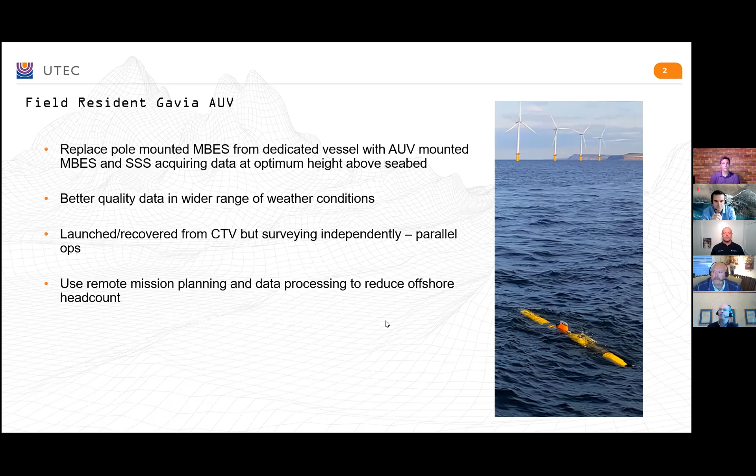The big bonus of this is we don't need a dedicated vessel. We can launch from anything, the CTV, and the Gavia can go off, do its survey, and then rendezvous with the CTV when it's finished. That lets the CTV get on with its own work, so we remove a survey vessel from the field. We can also reduce the head count operating the AUV through remote mission planning and remote data processing, but we still need an operator in the field.

To explain more about the Gavia: it's a 3.5 meter long, 200 millimeter diameter torpedo essentially, with a propeller at the back, and sensors mounted in a series of modules that click together very easily. It's battery powered, with a control module housing a lot of the INS and navigation software. You reference the INS using GPS built into it, so you can feed it RTK or corrected positions, which seeds the INS so that when it goes subsea, it's navigating on INS and DVL.

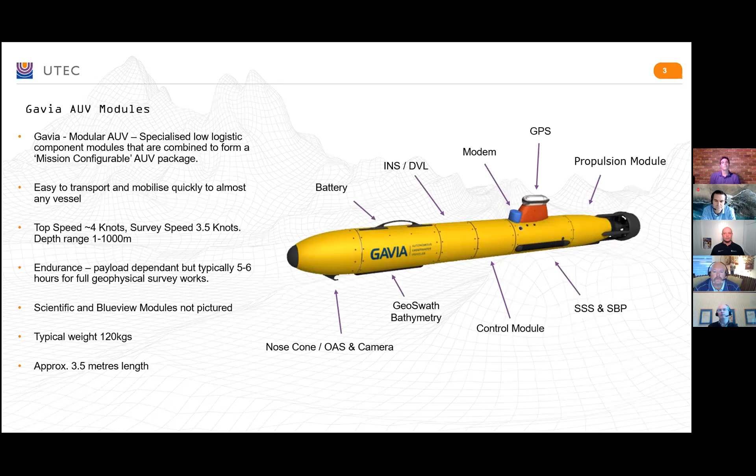We can easily move it to a job and transfer it from boat to boat because it breaks down into modules about 300 millimeters long. Typical survey speed is 3.5 knots, with a depth range of 1 to 1,000 meters - though that doesn't really apply in wind farms, where we're working more like 20 to 60 meters. We typically get 6 hours on a battery charge, and you can change out the battery modules to keep the same vehicle running. It weighs 120 kilos, so two men can lift it and move it around the deck or carry it onto a boat.

Looking at some of the sensors, we don't have a Reson or R2 Sonic multi-beam. We have the Geoswath Plus, which is a 500 kilohertz interferometric swathe bathymetry system.

That's probably our most difficult part in getting Gavia adopted by the wind farm operators. Their specifications are written for pole-mounted multi-beam, and we spend a lot of time explaining that interferometric is as good, if not better, in certain aspects than multi-beam, but it doesn't meet the specification they've got written. So we have to try and persuade them to accept this alternate system.

It's very efficient at what it does - that's the whole point of interferometric. You can get a greater range of swathe in a single pass. We typically work at a 5 meter altitude, and that will give us a 40 to 50 meter swathe of good quality data. There have been various papers that say it's IHO special order 1a compliant, but as I say, that's our challenge - persuading the wind farm operators of this.

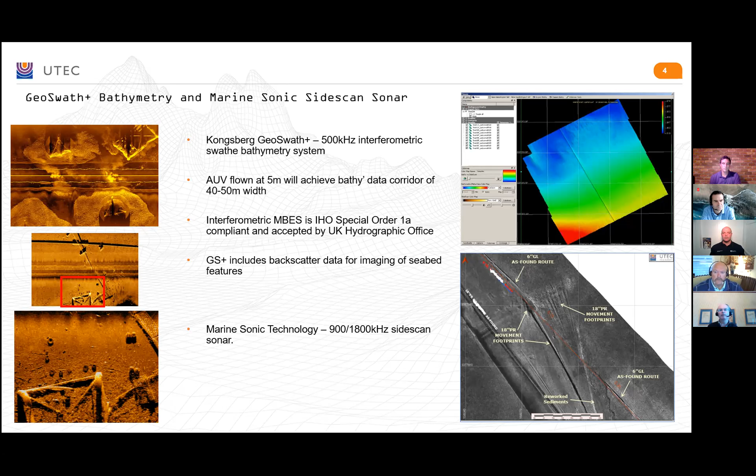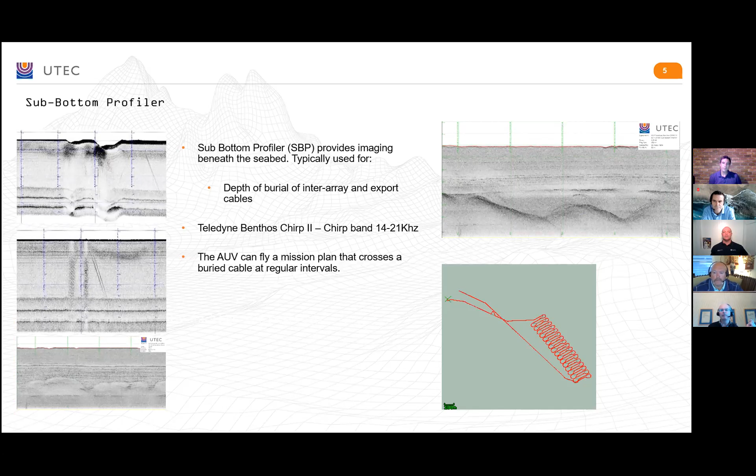The sub-bottom profiler isn't the strongest sensor on the vehicle, just due to size and power limitations, but it's good for export cables, though it would struggle with most inter-array cables. It is there though, and we can program the Gavia to fly in a mission where it goes backwards and forwards across the cable to get a series of depth profiles.

The camera is a monochrome camera. It wasn't as widely used as it should be when we've been doing pipeline inspection in deeper waters and route surveys, but it has come into its own in the shallower water of the wind farms. That's because we're getting quite a lot of ambient light coming down to the seabed, which gives us better lighting than we get from the built-in lights on the Gavia. So we're able to get good quality images with wider coverage than when we were just reliant on the Gavia camera.

We can also just mosaic by the Gavia position, so you can stitch the photographs together using the metadata associated with each image. Then once we've got that georeferenced point cloud from the mosaicing, that can be imported into the multi-beam side scan data.

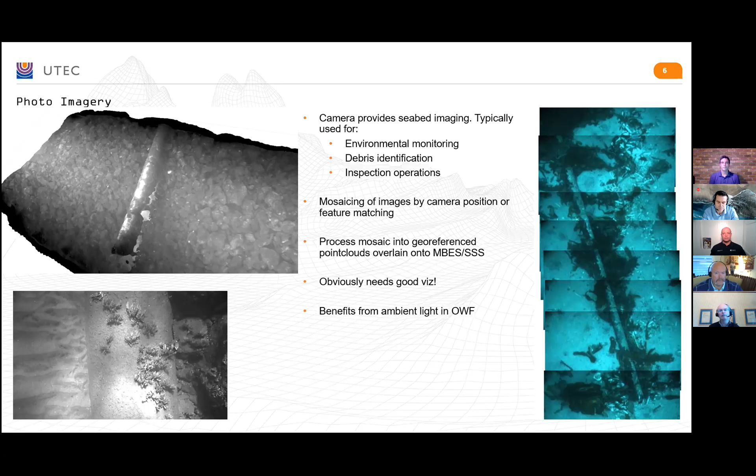Obviously you need good visibility. If you can't see anything due to mud in the water, you're not going to get much, but we're finding that a lot of the wind farms actually have good viz.

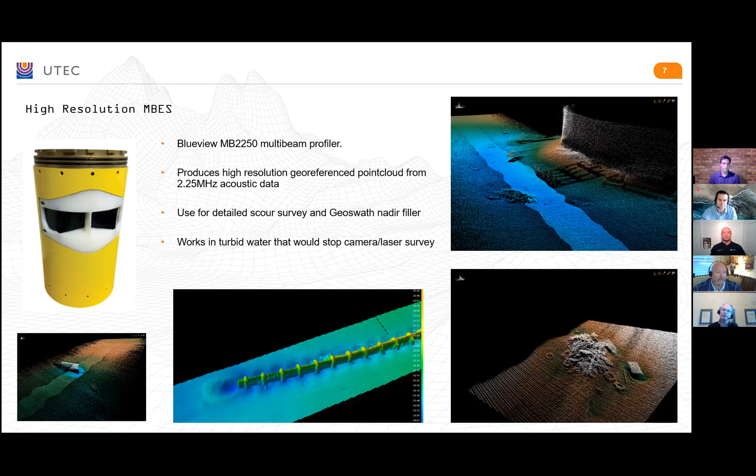A couple of years ago now, we invested in a BlueView module. That gives us a 2.25 megahertz imaging sonar, which can produce a point cloud. We can use that for detailed scour surveys, but it also fills in what's known as the nadir gap on the Geoswath. Unlike a multi-beam, where you can have beams across the full swathe, the way the interferometric system works there's actually a gap in the data below the Gavia. So by using the BlueView as a gap filler, it means we can increase the line spacing - we don't need the overlap that we used to do.

There is another module called a scientific module, which is basically an interface for any other sensor you want to attach to the vehicle, either internally or externally. Teledyne, the manufacturer, have developed a couple of magnetometer options, towed and built-in, that can go with a Gavia. You can also add video cameras or even a laser profiler, all within the weight limits of the vehicle - it's not a Hugin with a huge payload.

It's a 120 kilo torpedo.

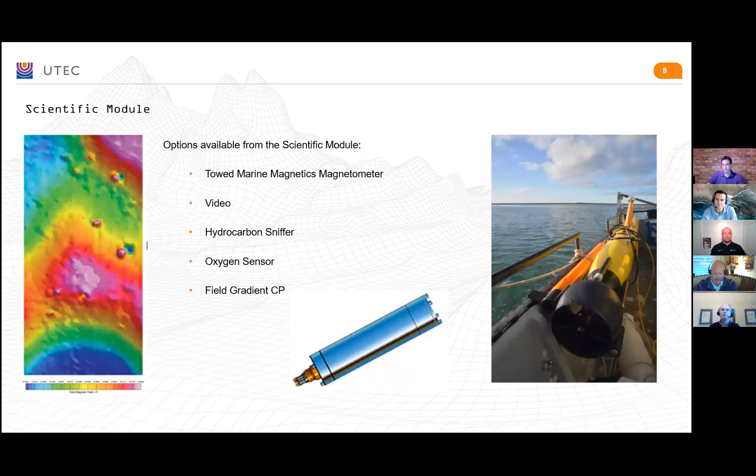This is the launch and recovery aspects of it. Because of the vehicle size and portability, we can go on to almost any vessel platform.

We prefer to use some form of crane to get it into the water. Gone are the days of manual handling, 120 kilos in and out of the water. So with a vessel crane, we can launch and recover with soft strops, boat hook for recovery, or we've got a variety of cages which let you deploy from bigger vessels with higher freeboard, and you just fly it in and out of the cage.

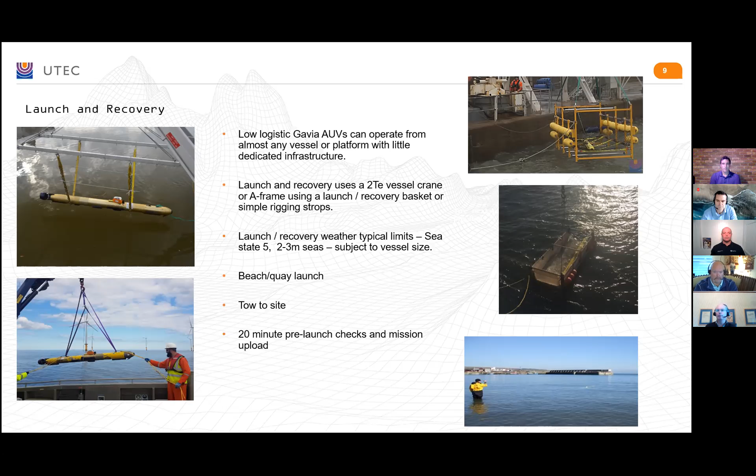You can put it in the water at a quayside or a beach, and it can then travel out to the work site, or you can actually tow it. If you had a small boat and were working in very shallow water, put it in the water in the harbour, then just tow it to site and release it to go do its mission. So very low logistics in the sense that we can operate without the dedicated large systems we see with bigger vehicles.

Operations, as I said before, 5 hours will give you plenty of time to be launched from a CTV, go away to a survey area, do a grid survey, and then return to rendezvous with the CTV.

We say that we need 2 AUV operators. This is where you're sending this very expensive bit of kit out on its own, and it's not like an ROV where you've got a tether to help recover the vehicle if everything goes wrong. So what we say initially is that we need 2 AUV operators to work the vehicle, because in the event of something going horribly wrong, it's a lot of pressure on one person. Now, what we foresee is that as we become a field resident vehicle, the CTV crew will become very familiar with the vehicle and launch and recovery, and they will start to help be the second man.

And that's in the business model we sell, for us eventually having a single operator supporting the vehicle.

Daylight operations, but not essential. It's fitted with enough communications and strobe lights that we can launch and recover at night, and it can obviously work at night subsea.

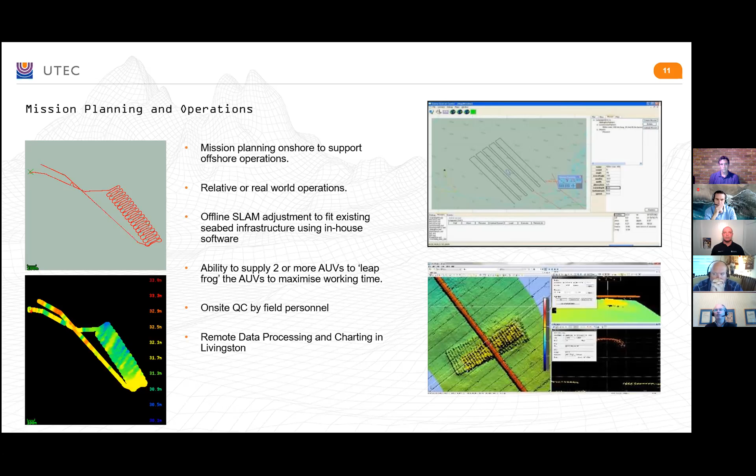So we've done various trials and demos for wind farm operators and been matched against conventional survey vessel CTV operations, and in all cases we've been able to show we've got greater weather capability and produced better data, without taking up boat time in doing it.

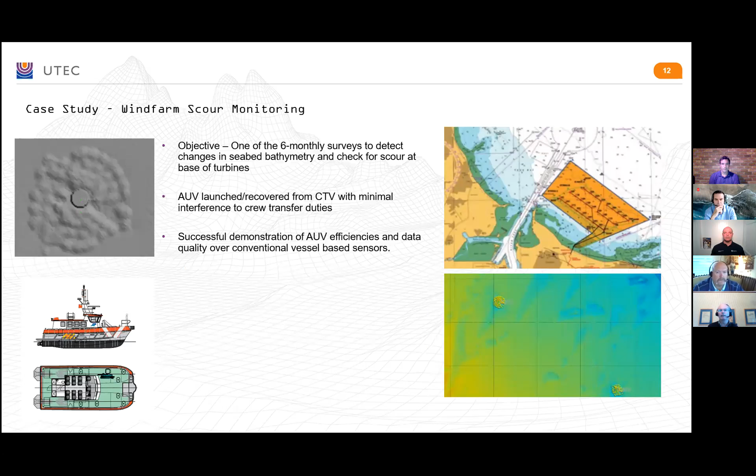So this is, for us, a key market that we're selling into, not just in Europe, but also now in Taiwan and East Coast USA.

Keith joins us from Blue Ocean Marine Services out in Western Australia, where he's the general manager. He's been with Blue Ocean for just over 5 years. Prior to that, he has a link with Trevor because he used to work for UTEC Survey. He's got a background in metocean science, spending about 12 years as a scientist. Educated at the University of Newcastle upon Tyne with a BSc with honours in marine biology, followed by a master's from University of Plymouth with distinction in applied marine sciences.

Blue Ocean Marine Services was established in September of this year.

This is born out of the group that I've been involved with for over 5 years, Blue Ocean Monitoring, and the Vertech group. So it is a joint venture. The reasoning behind that was that Blue Ocean Monitoring was set up on the belief that autonomous systems would revolutionize how we do things offshore, and it quickly evolved into more of an R&D hub.

Blue Ocean Monitoring have been successful in setting up a few businesses. One you may have heard of is Blue Ocean Seismic Services, now owned by Woodside and BP, looking to revolutionize the seismic industry by designing and developing flying ocean bottom nodes. We also have a number of two defense businesses, again very much focused around R&D.

So I guess the focus was lost on commercial survey delivery, and hence why this JV was created. We went with the Vertech group because they have a lot of synergies in terms of the technology they use and embrace, their geographical footprint, and their presence in the oil and gas sector. So together we've now formed Blue Ocean Marine Services, a global survey services business.

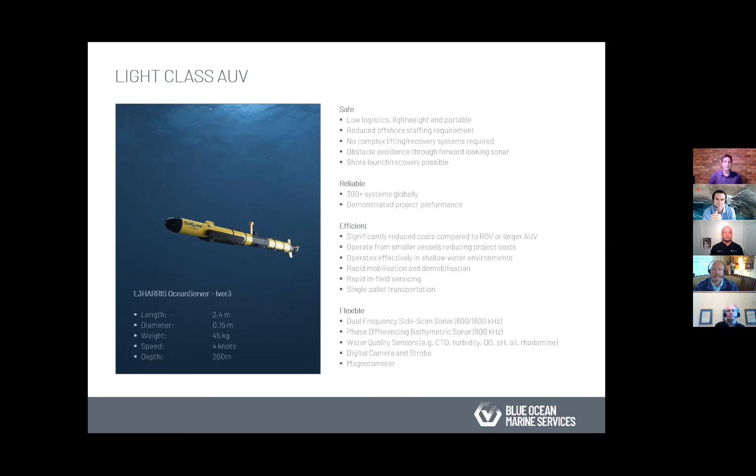Going through this, specifically around pipeline inspection, we invested in the IVER 3 in the middle of last year, and we put it to test immediately on a project here in Western Australia, really as a proof of concept. That has evolved. We have a fairly rigorous in-field testing program here at Blue Ocean Marine Services in waters off Perth.

Really for us, we were looking at a number of key success criteria for this application. The obvious one being lowering cost. We were looking at, can we reduce operational schedules or be opportunistic and flexible in terms of schedules? So if weather windows limited or opened up opportunity, we could go for SimOps, for example, where we can deploy and be ready in short timeframes.

From a logistical standpoint, a big thing with AUVs and ROVs traditionally is getting things to site. So looking at that, the labor effort, the intensity around logistics, and then obviously you're looking at risk, whether that be project or financial risk, environmental risk, and of course human risk.

That's all well and good if you can lower those things, but if you can't maintain status quo in terms of quality, there's no point trying. So if we can satisfy that or raise the quality - when I say quality, accuracy, resolution, accessibility of data - those are the success pathway, and this presentation goes through that based on the projects we've conducted now commercially.

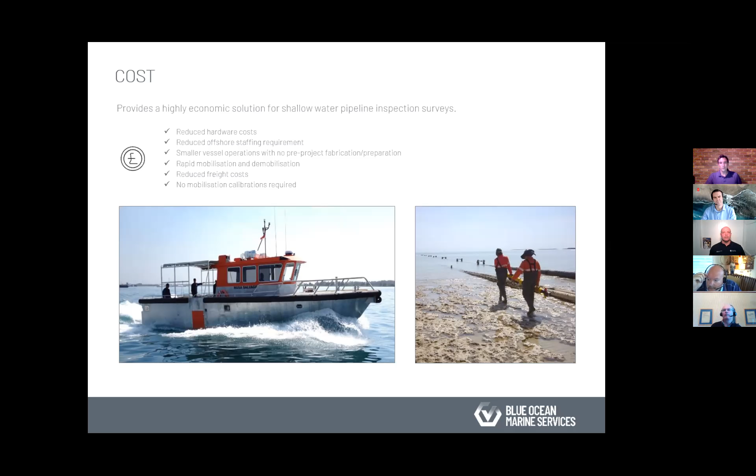You can see in the images here, a vessel we used recently in Indonesia. On the left-hand side, to the right-hand side, this is part of the proof of concept where we're testing shore launch. So 45 kgs, 2 people waded into the shore, and off it goes.

We could be there in a day, and we could be on the boat basically starting project prep in transit within 24 hours, which feeds quite well into the cyclonic season, which we have, which has just started. So rapid response, emergency response is another market sector we're looking at.

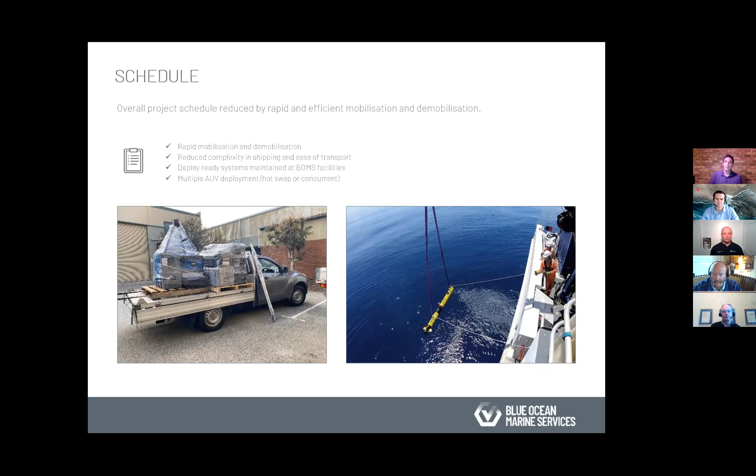In terms of logistics, like I said before, it's very, very simple. Ready to go systems, palletable, manhandleable systems. The image to the left was on the proof of concept where we were actually operating in SimOps. The vessel demand was high. Sometimes we had to march the AUV from one side of an island to the next to either meet the vessel or shore launch.

There's no complexity in terms of the fabrication. Our launch and recovery systems are simple. I mean, we're talking about a crane arm and a couple of strops. We have a number of ways of deploying for different vessel types, but this can quite literally be over the side of a rib.

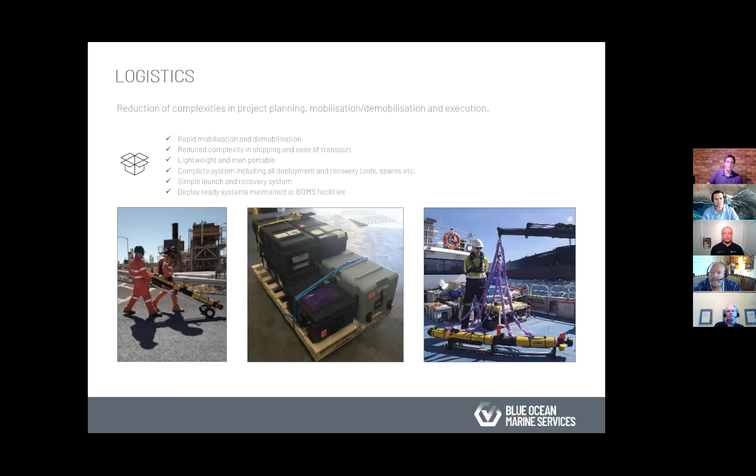Risk is a big one. So we've proven that on our projects we can lower these risks significantly. We talked about the staffing, people offshore. It is what the offshore industry is trying to do to reduce staffing requirements offshore. We rely on a team of 2 to go with the AUV per 12-hour mission.

We're not restricted to daylight operations. We can go 24 hours, which obviously increases your staffing input. But again, small, compact, small team. The team are fully trained. There is no separation between the people working on the AUV in the workshop to the people who are deploying it in the field. So we can troubleshoot in the field.

We offer the redundancy with the AUV. Each project will have an ROV, a compact class ROV go with it. The USBL systems are the same. It has a cutting tool and a manipulator. So if, for example, the AUV was to get caught up in seaweed or fishing line, we can go and recover. That said, the AUV's got smarts inside it. It has a safe return path protocol whereby if it does get into trouble, it will surface and it will navigate itself back to a predefined waypoint for recovery.

It's got a collision avoidance system. This AUV is not going to cause any damage to any subsea infrastructure, but we're a little bit concerned about it getting damaged itself. So it has that forward-looking sonar for collision avoidance.

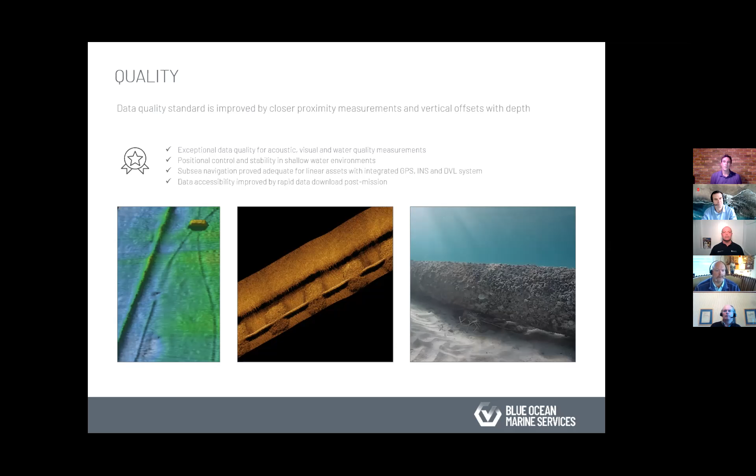And then our data accessibility has been improved with the development with L3 Harris. So typically we're looking at sort of 45 minute turnaround times, downloading the information, getting that information to our surveyors on board to check what has previously been collected.

When I say there's a case study with a twist, this is it. It's worth talking about this project, because it's fresh in my head, we've just come off it. It was a project whereby the client needed to mobilize quickly. He wanted what they wanted.

They were looking at two scopes: one scope for AUV, coming back from AUV, and then mobilizing a second scope to an ROV contractor to investigate the findings of the AUV. So we actually looked at an integrated approach. With the Vertech group comes a number of companies, one of them being GeoOceans, who just picked up the Subsea Energy Australia Award a few weeks ago for Company of the Year.

They have a fleet of about 20 compact class ROVs, so we got together with them and approached this in an integrated way. At a high level summary, we were really looking at the AUV to fly the radials, identify free spans and any other anomalies, and then the ROV to go in and investigate.

It was 90 kilometers of pipeline. They wanted both low and high resolution side scan. Bathy wasn't a requirement, but it was recorded and has been processed. They wanted onboard processing and then the ROV to be deployed whilst the AUV was underway on its next mission. So a fully integrated, one vessel, one mob, one demob, get the job done and come home.

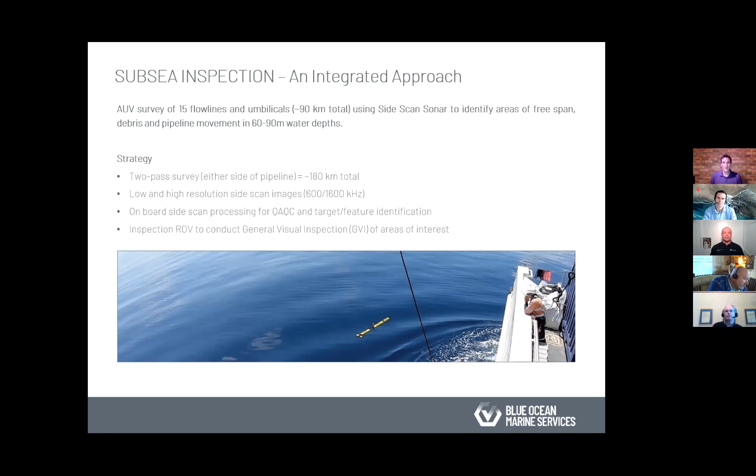So in terms of those four bullet points, we'll go through those. This is the vessel we operated off, the full ROV, AUV spread. The containers on board aren't ours. It was putting a full operational team together.

This is only for daylight operations. We could have accommodated 24-hour ops, but it wasn't necessary given the short time frame of the project.

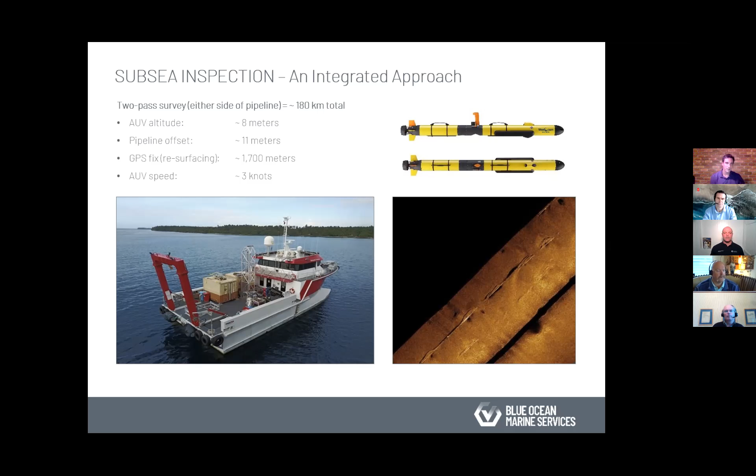Our AUV was put to task at approximately 8 meters altitude with a pipeline offset of 11 meters, which gave us sufficient forgiveness in the positional control to pick up what we were looking for. Our GPS fixes, so the AUV surfacing to get the fix to seed the INS and DVL, was typically around 1,700 meters, and our AUV speed was traveling at about 3 knots.

With the side scan, we were to pick up 6 flow lines. They varied in diameter between 4 and 14 inches, and then 9 umbilicals, 4 to 5 inches, which is a little bit challenging. We were in 60 to 90 meters water depth.

We adopted a 2-pass approach on the pipeline, so 90 kilometers of pipeline turns into 180 kilometers. We were able to achieve that in 17 AUV missions and total water time of 23 hours.

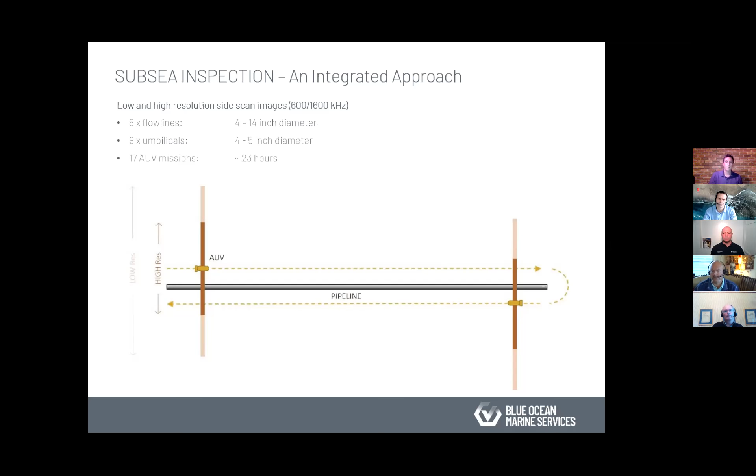With respect to the onboard processing, we had a 3-man team rather than a 2-man team. We had a data processor on board. The idea was to be able to QA, QC and process the data for target and feature identification, to inform the ROV scope.

So you can see in the image there, lots to get involved in. 90 kilometers of pipeline, 271 free spans, not only in the flow lines but also the umbilicals. There was various infrastructure that we had a look at outside of the scope, anode skids, Christmas trees, etc. And then we identified other anomalies of interest in close proximity to the pipeline.

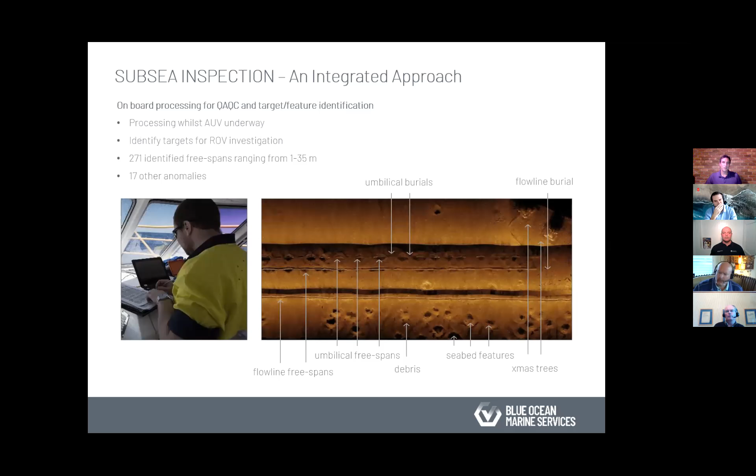And this is where GeoOceans came in. They were under a USBL system with the Saab Seaeye Falcon. Blue Ocean Marine Services provided the positional spread and positional services for their ROV. And whilst the AUV was running the radials, running the pipelines, the ROV was getting wet, doing the investigations.

So it really was an integrated, hand-in-hand type operation. It was very effective. There was no downtime associated with our SimOps. It was managed very effectively.

The beauty of the ROV is you can investigate your perception from the quick processing on board of a free span. We saw free spans of 1 meter to 35 meters, and for a lot of them the ROV can go in and with certainty give a general visual inspection and confirm that the free span exists, but also physically measure the length of the free span and height.

That ROV was equipped with other tools, gauging tools. They had UT on board, they had CP on board. So these are additional scope items that were brought in, but just outside of this presentation. I wanted to focus on what we do, not what GeoOceans does.

But it was really effective. The entire scope was completed on time, 100% deliverable, and full client satisfaction.

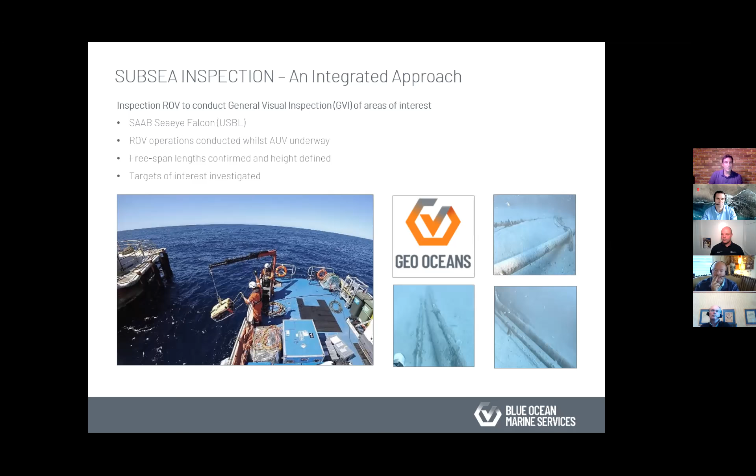Other applications and services we're interested in, I won't go through all of them. We're mobilizing for a cable route survey where we're going to tow a magnetometer over quite an extensive area with the IVER 3 system, for a utilities project. We have another pipeline inspection coming up, on the back of the success of the others. We have a Met-Ocean survey where we put the IVER to task doing water profiling work, which has opened up further work in the Met-Ocean space, putting in deep water moorings and doing environmental monitoring up in Indonesia. We're also using the IVER 3 AUV for produced formation water monitoring, or plume monitoring. As the PFW is discharged pre, during, and after, we can use the IVER 3 very quickly to look inside that plume, cycling transects to understand plume dynamics.

One thing that's come up recently: we've just entered cyclone season down here, which is an exciting time for everyone. The fact is we've got two AUVs sitting here, ready to go, ready to be put on a truck and be in the Pilbara within 24 hours, or on a truck or a plane. That market's opening up for us. So that's a kind of summation of where we're at. Blue Ocean Marine Services has only been established since September, so we're still getting up and running, but there's a pretty hefty project pipeline ahead of us, and it's exciting times—pardon the pun, but the pipeline. Thanks for your time, and I'll close off there.

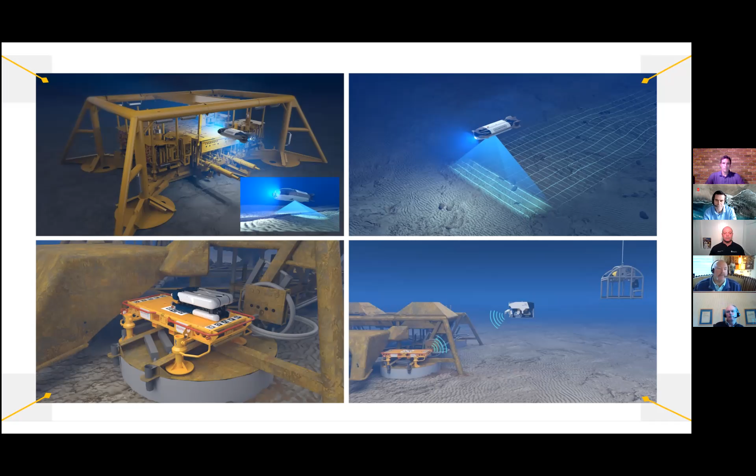The software operating system is system agnostic, meaning it supports a variety of mission types we can throw at it. This agnostic approach allows for easy rollout to the entire fleet I just talked about. We change one aspect in a package and that rolls up to all the different ones, so we're all on that same path. Our current Freedom platform is that pipeline inspection system, and how we're going about doing that at this time.

We typically find pipeline inspections are done with AUVs or ROVs, which is quite commonplace these days. The difference between our Freedom and conventional technology is pretty huge. A typical AUV flies between 5 and 15 meters over the seabed. They don't hover, they don't stop over a pipeline, they don't intuitively investigate an object that comes into view, and they don't park themselves into a garage automatically. That's the fundamental difference between this Freedom platform and conventional AUV systems. So our goal was to develop all of that.

Plus, we needed to operate 1 meter over the seabed. Normally 1 meter is way too close. When you're flying at that distance, you need some serious machine learning and artificial intelligence algorithms running. So that's two must-haves we asked for: keep the Freedom and the subsea assets safe, and track the pipeline reliably.

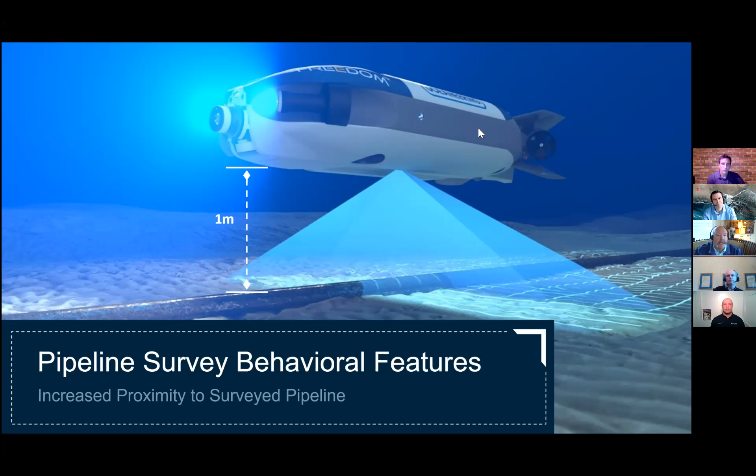Flying low brought its own set of challenges, mainly bumping into things, a big no-no in the industry. You don't want to hit a customer's asset. Lower altitude gives you much better resolution but a much shorter reaction time to maneuver out of a situation. So the supervisory software control enables this safety, running an array of sensors 360 degrees around the vehicle itself.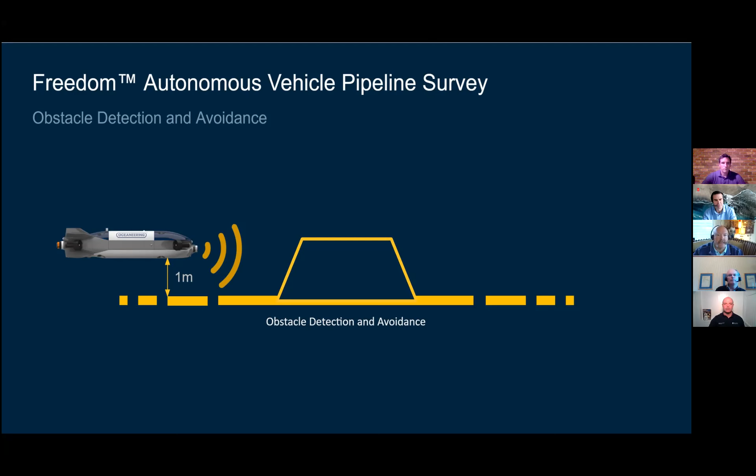Effectively, we've built a platform with enhanced situational awareness. It's packed with machine learning. It can recognize pipeline features, detect free spans on its own, look at depleted anodes and analyze those, identify different crossings where mattresses would be, and alert on anomalies, which can then trigger other missions for it to go investigate.

When you have this ability, you essentially eliminate the need for hiring another vessel to come out and do a whole other project. No chartering, no ROV crews required, and you don't have to go find a survey contractor. This keeps the carbon footprint down, and the HSE environment remains safe and in the green. That's one of the benefits of this automation we're running.

Traditionally, inspection ROVs fly about 5 meters or so. Faster update rates from the onboard systems enable us to monitor what's going on. So when it identifies something, like an object on the pipeline it was flying over, the machine learning kicks in and it can stop, hover, kick on the 3D lasers, turn on the video system, and take high-def images of it, because all these sensors work with the onboard processing system.

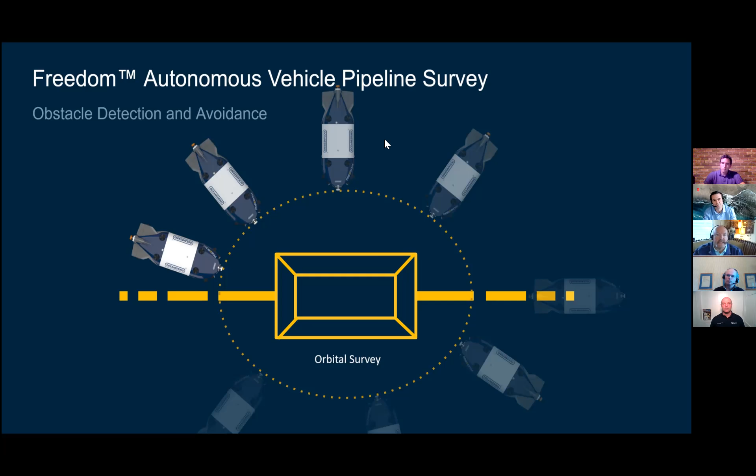So I've got this video here. This was taken in our living lab in Norway. Let me just click the play button there. This is in Tau, a fjord not far from our Norwegian office.

So we've been performing in-water tests for nearly 2 years now, I would think. And this living lab has quite a unique place because it's got a plethora of subsea assets all along the seabed. It's kind of built into a fjord, so it's pretty protected from the environment, but yet it's in deep water, shallow to deep water. So what we have is like an exact replica of what it would encounter in a real live offshore environment. So the testing has been great.

What's become apparent is that the autonomy isn't easy. It takes a tremendous amount of programming and time to get this right. Adjusting algorithms for real world applications is constant.

This video is going to show you also how we launch and recover the Freedom system. So the sensors on board, they've got the 6 degrees of motion with the thrusters, and it allows itself to come in and dock into its own garage. This allows us to deploy it below the ship's hull in a safe distance, away from the propellers and thrusters, and then it can go out of the garage itself, fly, do its mission, and then return back safely.

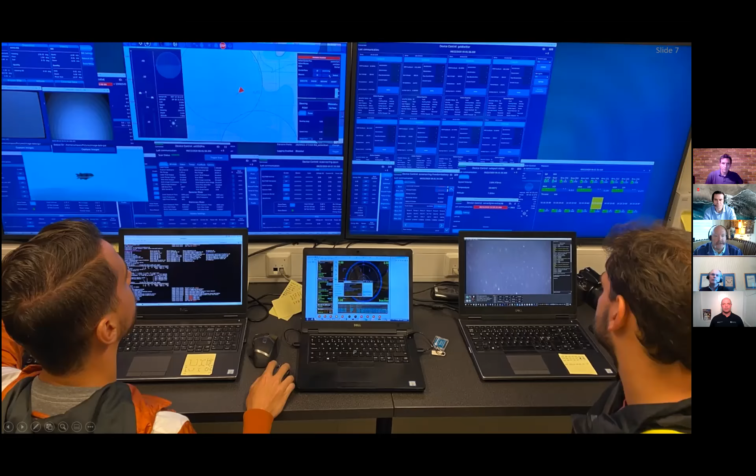So this is a picture of our graphical user interface. The data is uploaded and downloaded from the vehicle, health status, mission information, power levels, alerts that it detected on its project, or any discoveries are all collected and analyzed here. So that's a lot of information coming through, but it's quite useful, the feedback.

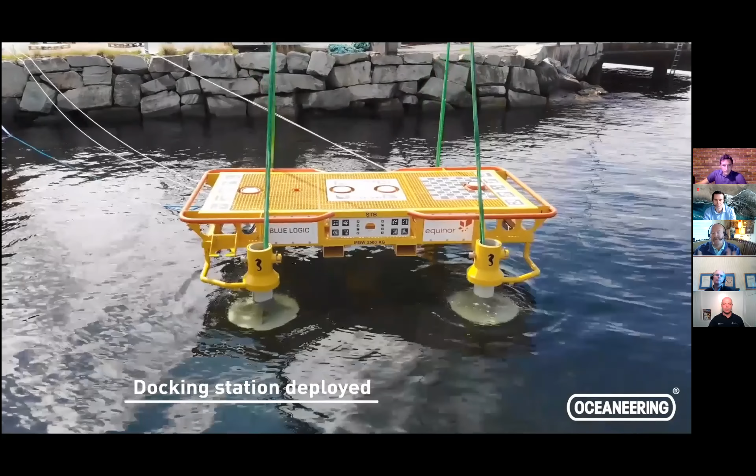So this September, we launched the first docking station. So this is Freedom actually going in and docking on this platform. So this set in motion a whole longevity issue of what AUVs can now do subsea. So that was a big hurdle in our testing to get this accomplished.

We convinced ourselves, but not only ourselves, but our clients, that this is now ready for in-field use. So now that we can dock, we can charge, we can upload the data, and this charging system acts like a new generation cell phone or an Apple Watch or something. It's got an inductive pad, and as it sits down, it charges the batteries that way. I'm not going to get into all the physics of how that works, but it's just the same as cell phones are working these days.

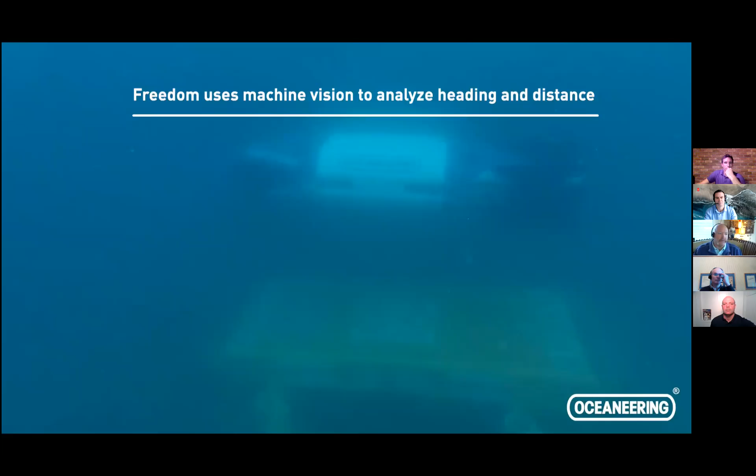So once it's charged, it's got its mission communications. We can upload and download information through this charging pad. It knows what it's doing then, and then it can head off and complete this mission. And then back and forth it goes.

So over time, and once these missions are done, the package can be returned, or if it's permanently installed on a subsea asset, we can then just leave it there for in-use or in-field operations. So that's why that was designed. That was a permanent type install in the future.

But what we're also looking at is the Liberty Enhanced ROV system. So this is a combination of old technology and new technology. The ROV itself is pretty much a traditional ROV. It's got a traditional pseudo traditional cage around it. It also has a battery bank, which is obviously new. That's providing power to the sub and to the sensors on board the ROV itself. Also, communication to the surface.

This is quite interesting. So once it's deployed over the side by a ship, there's a communications buoy that comes up to the surface, clicks into the 4G cell towers in the area. So this is great for North Sea applications where you do have that kind of connectivity out there.

So the EROV is completely on its own. Once it's deployed and set up, this whole platform is lowered into the water, the vessel can go back to port or go off and do another project, whatever it is needed to do. But the key here is we're in control of this entire ROV package from our remote control monitoring systems. We've got them in Morgan City and we have them in Norway, where we can actually take control and operate these ROVs.

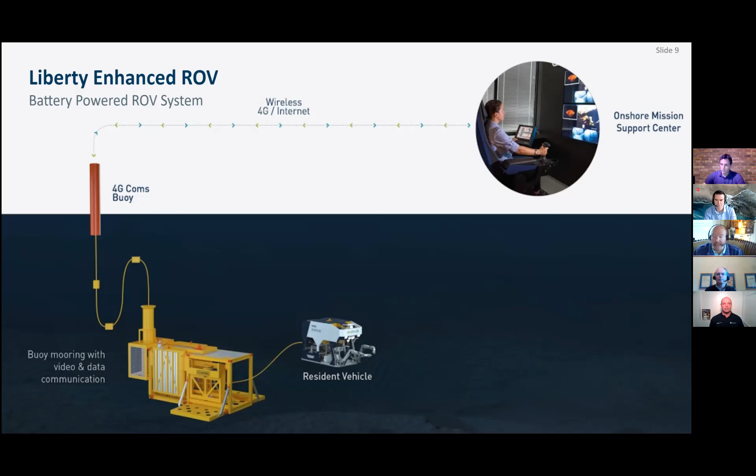This isn't a conceptual thing. We've been running this actual operation now for about 1.5 years. So it is actually deployed in the North Sea working today. So what we're looking to do is use this technology from the Liberty EROV system and then combine that with Freedom.

So when you start doing that, you get yourself off that tether. The Liberty EROV would typically have like a 500-meter tether on it, so it can move around its garage there. Well, with Freedom and the autonomous platform that we're running, we don't have a tether. So all of a sudden you have a much greater area that you can cover. It opens the door for much more cost-effective solutions, and once it's charged up, it's running on its own accord, bringing back so much more data on that real-time monitoring.

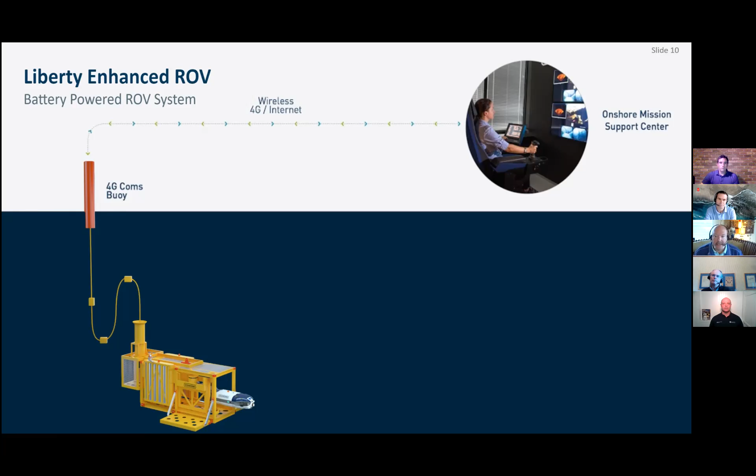Great for inspection type platforms. I think the neat thing is it's an entire mobile solution. Nothing permanent installed - again, it's project specific. We can come in, drop this thing, it can go do its project, and then it can be recovered at the end of the job. So that's where we're heading with this.

So some Freedom examples here of what we're talking about. It's a whole new application. We have the charging station, we have the communications upload/download facility now that's developed. Once that's done, the doors open for this whole world of autonomy with our Freedom platform here. So there's nothing, again, permanently installed. Everything is temporary - missions are uploaded, and the vessel or the vehicle goes out.

We can cover, as I said earlier, about 200 kilometers per mission with this system. If you look at that, that's about a third of the greater London area on one project. So with three missions back and forth from this garage, we can effectively cover the whole of the London metro area. That really changes things.

So I guess really in summary, the autonomous vehicles still have a ways to go. Some of this is conceptual, some of this is actually being used in real life, so we're beginning to blend it all together. The vehicle itself, as you see, is operating - it's about to go into its first real sea trial in the North Sea. It should be very soon, probably by the time this airs at Oceanology, that will have occurred.

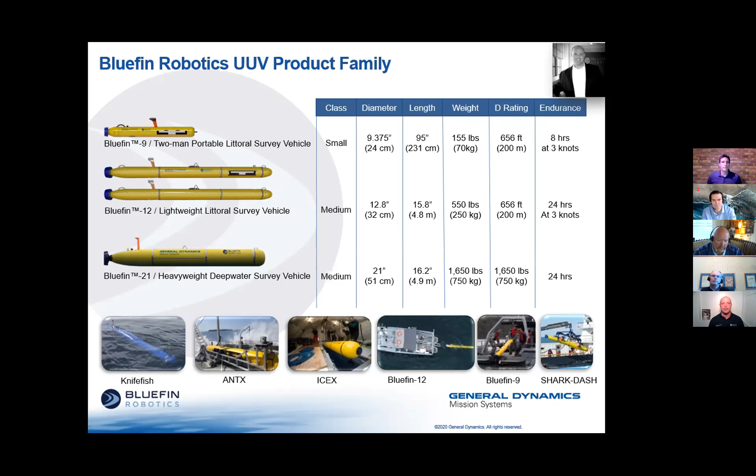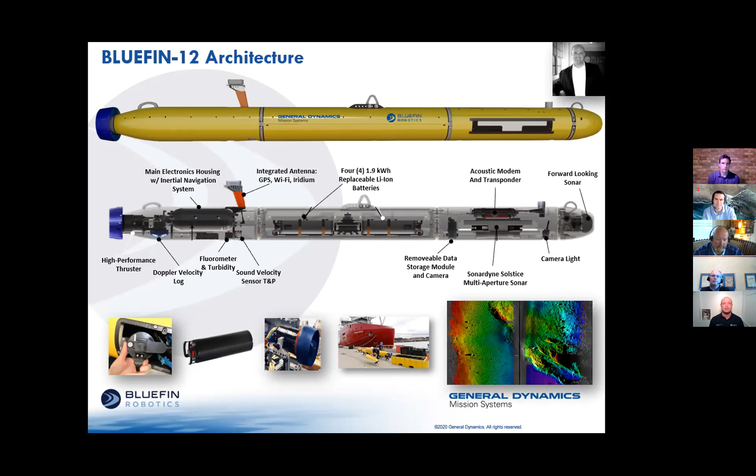So today, what we're doing is we're going to review some of the marine operations conducted around the globe in challenging environments. Really, our operators are the ones that are put in some very unique situations, and these four examples highlight some of the challenging environments that they're operating in. This includes high current operations in the Solent, United Kingdom, shallow water operations in varying salinities in the Patuxent River, Maryland, in the United States, under ice operations in the Arctic Circle, and some highlights from the work our team is doing in Australia as part of the SEA 1778 program.

Last November, the team was fortunate to collaborate with the UK MOD Maritime Autonomous Systems trial team aboard their USV to operate and test our Bluefin 9 in the Solent. While working with MAST, our Bluefin 9 was deployed aboard their USV to evaluate the quality of data generated by a UUV in high current environments. The Bluefin 9 was tested with its integrated navigation package, which included a Nortek DVL and iXblue INS, and the Sonardyne Solstice multi-aperture side-scan sonar.

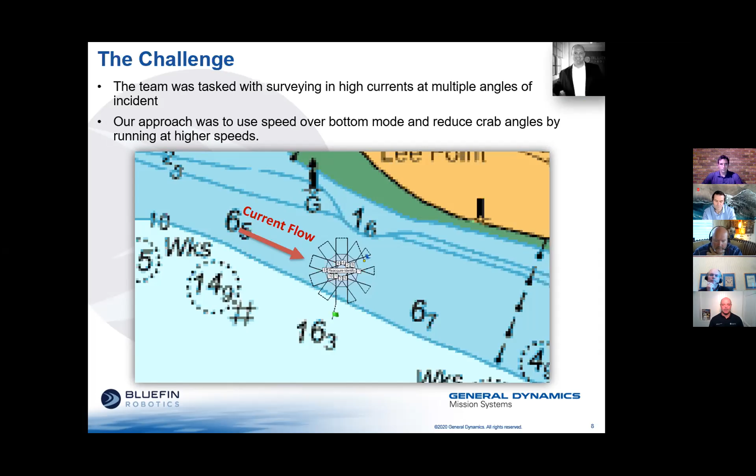However, our goal for this operation was to counteract the dynamic current by adjusting the propeller's RPM to keep the intended and optimal speed for the operation. What we actually found is that the ducted thruster increased or decreased RPMs, and as it did so, it slightly impacted the UUV's roll stability on certain headings.

The lesson learned, and the UUV team's solution, was to switch our mission planning configuration to a constant RPM setting for the thruster. This allowed constant propeller thrust as the UUV swam on each heading. The trade-off resulted in a slightly higher crabbing angle as the UUV approached the dynamic current. Our team thought that this would be a challenge for side-scan sonar data generation, since historically, increased crabbing angles skewed data collected by side-scan sonars.

Upon recovery of the UUV, the team reviewed the data and were delightfully surprised at what was generated, and continued to operate the UUV in the same dynamic current. The combination of a high accuracy navigation package and multi-aperture sonar produced data in a dynamic current with little data degradation. Of course, due to the crabbing angle, the overall swath width was slightly reduced by a few meters. However, the overall mission was pretty successful and showed little skewing of the data. This was a great advantage for UUV operations working in this riverine environment.

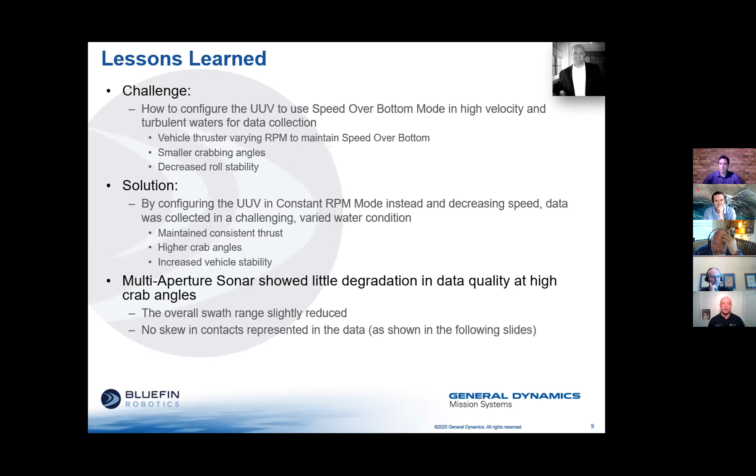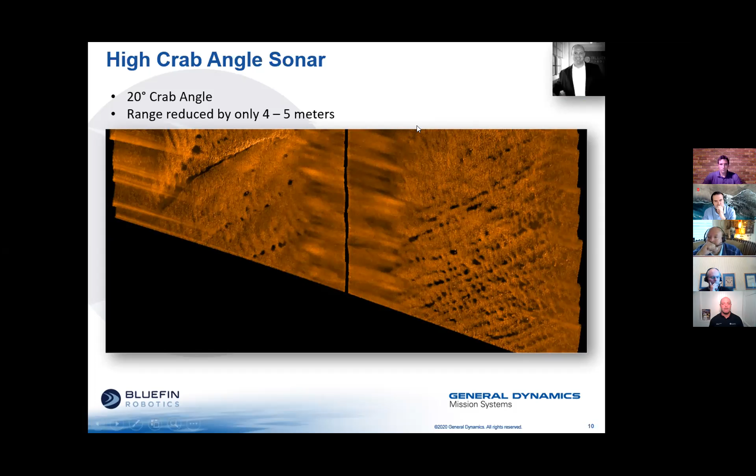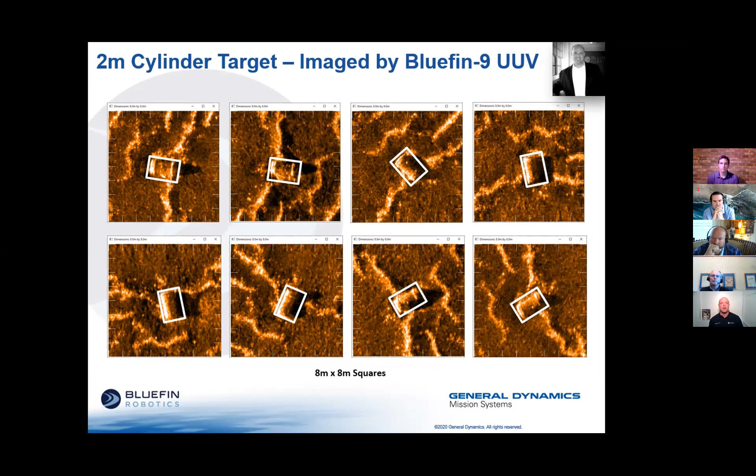Current can have a dramatic impact on data generation. However, what was significant and remarkable about this operation is that no matter which heading it was, you can see that this block was highlighted very well.

Our next operation takes us to the shores of the Patuxent River, a tributary to the Chesapeake Bay in Maryland. UUV operations in a riverine environment can present some really unique challenges.

For this operation, our team was challenged to operate the Bluefin UUV in very shallow water with varying salinity and high turbidity. Due to the varying salinity caused by freshets, for a couple of days prior to this operation, it had poured and there was a lot of rain. The team had to adjust our buoyancy calculations and account for operations in both fresh and brackish water.

The team was pretty confident that because of the free-flooded architecture, we could adjust to the buoyancy and salinity values as the vehicle swam, but it was a challenge and certainly a risk when operating in a shallow environment.

We feel that one of the advantages to a free-flooded architecture is that the UUV has a greater tolerance for varying salinities. In this mission, the Bluefin 9 was run again with the Sonardyne Solstice in a typical lawnmower pattern in very shallow water.

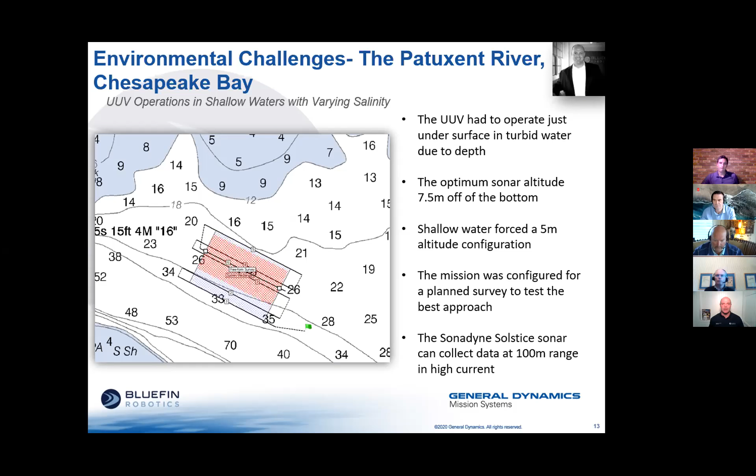Operating in very shallow water presents some challenges when conducting side-scan surveys. For many sonars, there's an optimal height off of the bottom for the sonar to swim. If you're too close to the bottom, data can be truncated or segmented too close to the surface, and you can generate some surface effect or multipath.

For this survey, we planned the mission to have the UUV swim as close to the surface and at approximately 5 meters off of the bottom. Our operators were elated to see the UUV's ability to generate data in this shallow water environment with about 100 meters of range on each side. So the swath width was about 100 meters on each side.

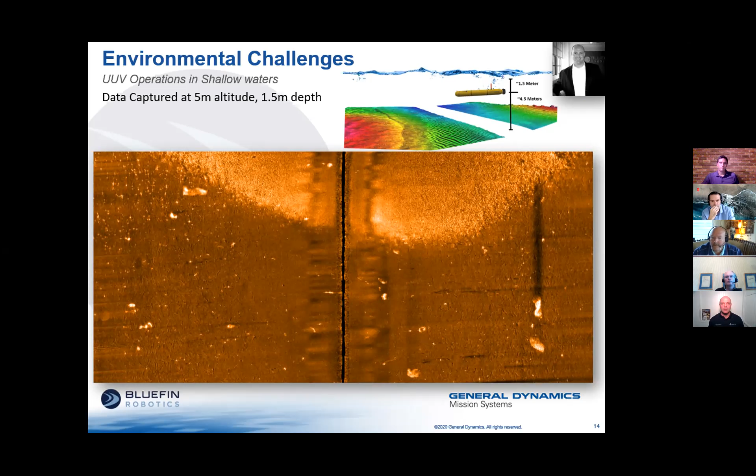Later in that same operation, we tried a different spot, and the team conducted a survey of a known wreck. This was an equally challenging environment, partly because it was a really tight channel. There was definitely some traffic, and because of the way the channel is configured, there was a very dynamic current with close walls, and then you had the wreck itself sitting on the seafloor.

The team was able to drop the vehicle in the water, and after the first survey leg, they quickly recovered it and pulled the removable data storage module while still on station, just to see what type of data they were going to get.

This was a great example because in this really unique riverine environment, you're still able to generate data with a UUV.

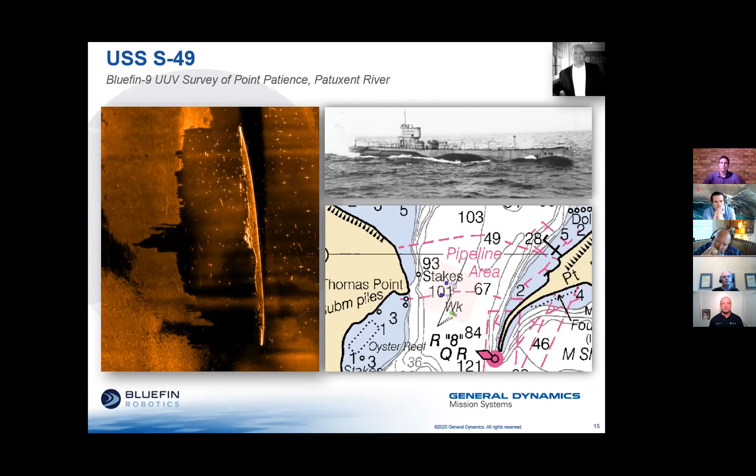As with every operation, there were many lessons learned on this one. This operation highlighted the ability to use a two-man portable free-flooded UUV in a shallow and congested riverine environment. Throughout this operation, our team was training both new operators and some familiar with previous generations of our vehicles. In this challenging environment, these operators were able to plan, execute, and conduct maintenance over several days without hesitation in order to generate this useful data.

It was a great business case for us. This type of mission had been a challenge for UUVs in the past, and there are some great examples of conventional side scan sonar that have been used on this actual wreck. We think the real reason this highly accurate data was generated in this suboptimal environment is because of the sensors we were using and the combined system, so that you can actually conduct UUV operations in the riverine environment.